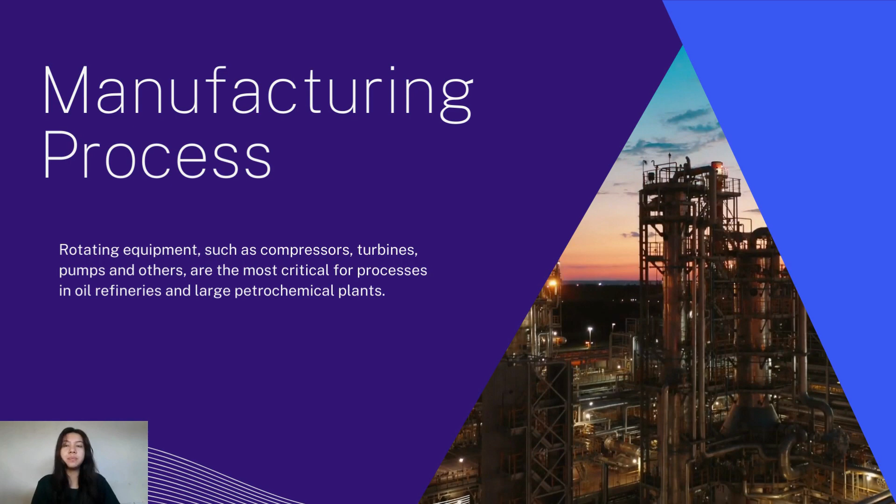Rotating equipment such as compressors, turbines, pumps, and others are the most critical for processes in oil refineries and large petrochemical plants. A refinery often consists of tankage, a distillation unit, recovery facilities for gases and light hydrocarbons, and the necessary utility systems such as steam, power, and water treatment plants.

A refinery must be equipped with proper tank facilities. The tanks are used to store raw materials and already refined products. When there are enough tanks in the refinery, there will be a continuous flow of operation as crude oil will be easily collected from the oil well and transferred into the necessary tank required for processing simultaneously.

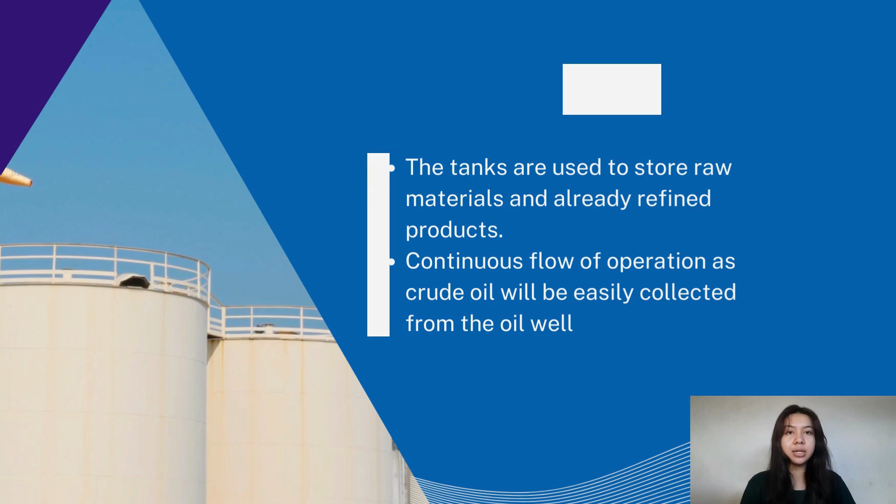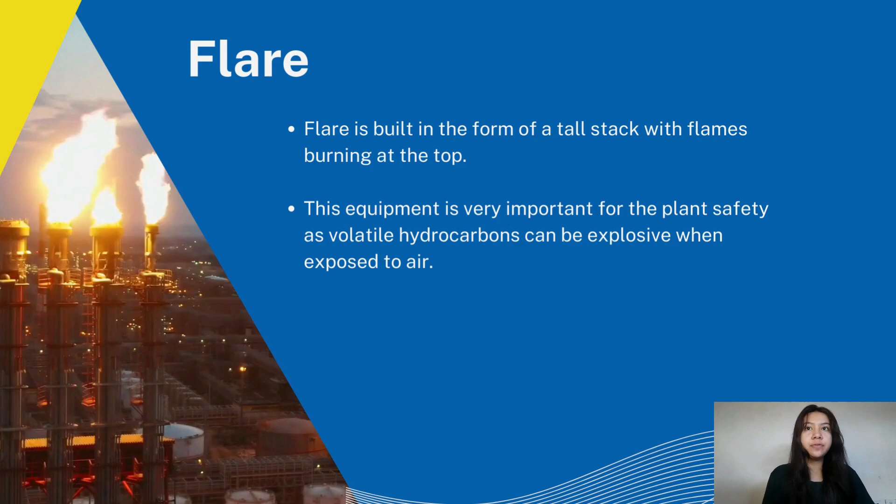The flare is built in the form of a tall stack with flames burning at the top. This equipment is very important for the plant's safety as volatile hydrocarbons can be explosive when exposed to air. In the event of equipment failure or plant shutdown, it is necessary to purge the volatile hydrocarbons from operating equipment so that it can be serviced.

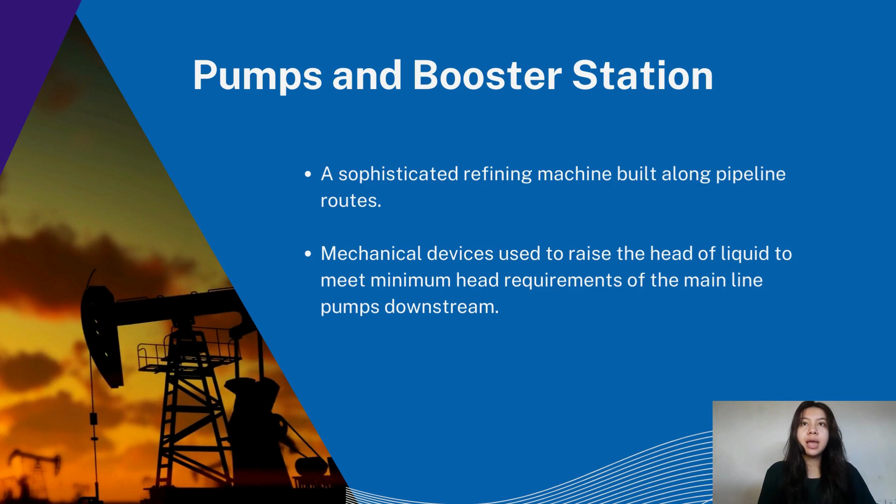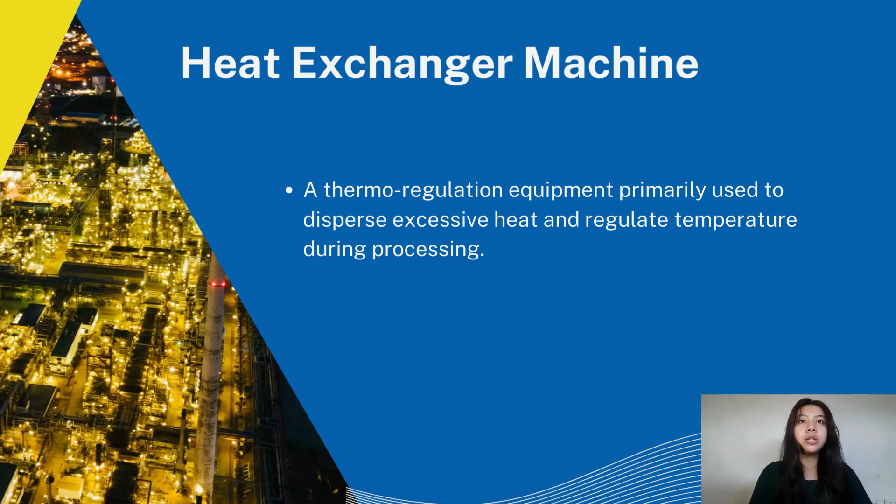A sophisticated refining machine is built along pipeline routes so that the transported material will get enough pumping power to reach its destination. The heat exchanger is a thermoregulation equipment primarily used to disperse excessive heat and regulate temperature during processing. The first media is the liquid or gas being processed, while the other media is the heat-absorbing coolant made up of chilled gas or liquid.

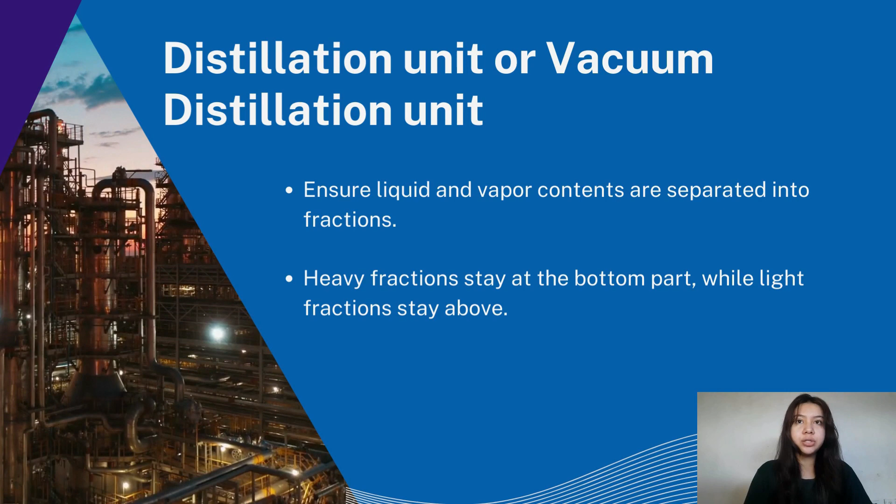The distillation units ensure liquid and vapor contents are separated into fractions. After attaining a certain boiling point, heavy fractions stay at the bottom part, while light fractions stay above. Petroleum and gasoline, which are the lightest form of fraction, rise to the top of the distillation unit to be condensed back into liquid.

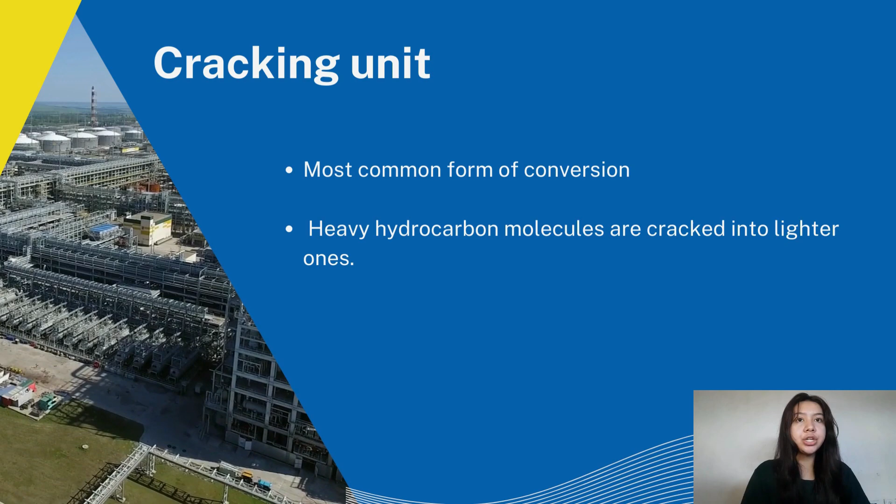Cracking is the most common form of conversion because it is powered by catalyst, pressure, heat, and maybe hydrogen. In this process, heavy hydrocarbon molecules are cracked into lighter ones. The cracking unit is made up of thick-walled reactors, heat exchangers, a chain of furnaces, and many other types of vessel.

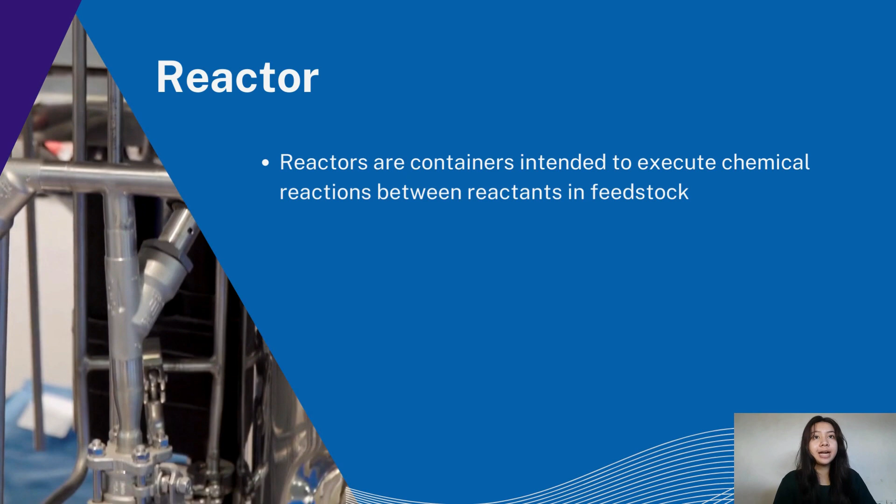Reactors are containers intended to execute chemical reactions between reactants in feedstock, or reactants in multiple feed streams, in the presence of a catalyst. Each refinery is uniquely designed to process specific crude oils into selected products.

In order to meet the business objectives of the refinery, the process designer selects from an array of basic processing units. In general, these units perform one of three functions.

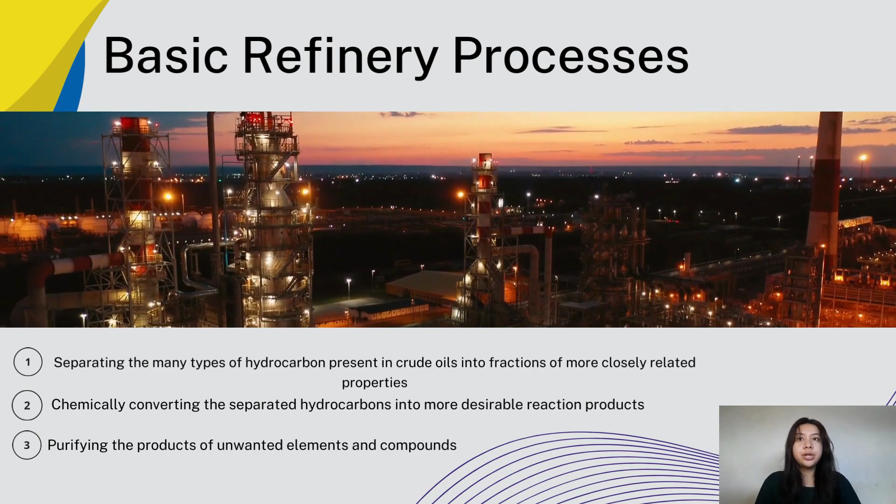Number one is separating the many types of hydrocarbons present in crude oils into fractions of more closely related properties. Second is chemically converting the separated hydrocarbons into more desirable reaction products. And the third is purifying the products of unwanted elements and compounds.

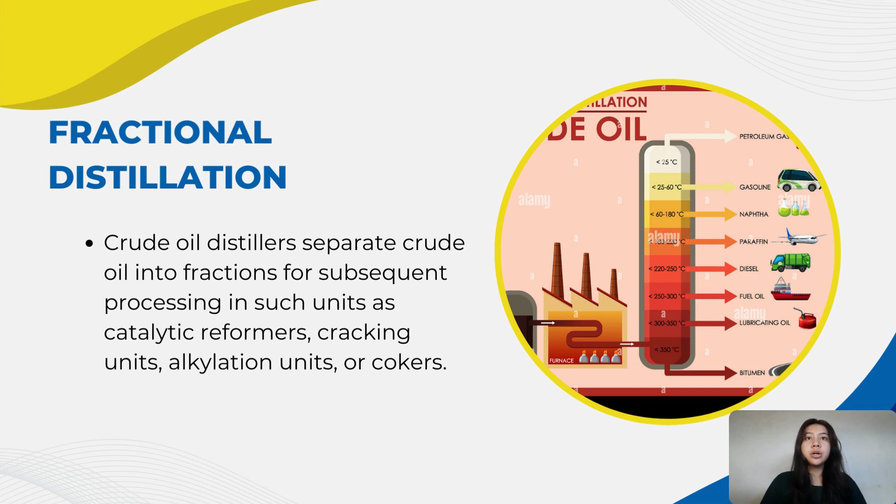For separation, we have first the fractional distillation. The primary process for separating the hydrocarbon component of crude oil is fractional distillation. Crude oil distillers separate crude oil into fractions for subsequent processing in such units as catalytic reformers, cracking units, alkylation units, or cokers.

In turn, each of these more complex processing units also incorporates a fractional distillation tower to separate its own reaction products. The principles of vacuum distillation resemble those of fractional distillation, except larger diameter columns are used to maintain comparable vapor velocities at reduced operating pressures.

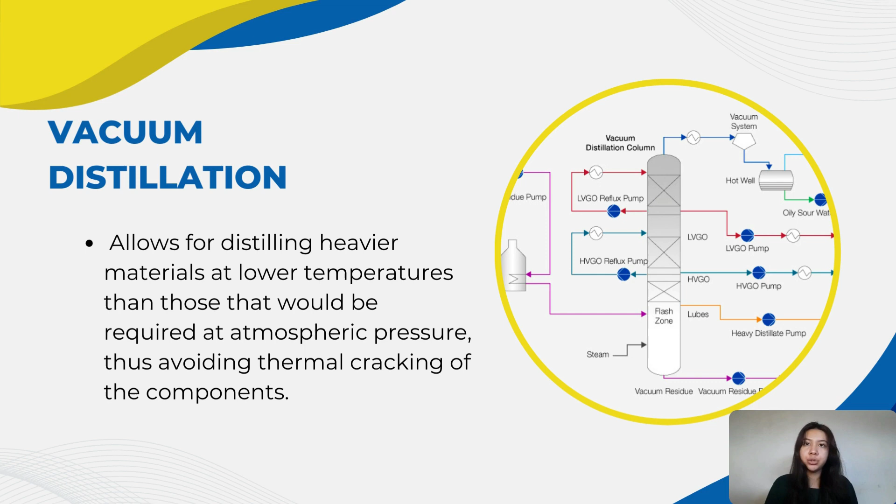The primary advantage of vacuum distillation is that it allows for distilling heavier materials at lower temperatures than those that would be required at atmospheric pressure, thus avoiding thermal cracking of the components.

Absorption processes are employed to recover valuable light components such as propane, propylene, butane, and butylene from the vapors that leave the top of the crude oil or processing unit fractionating columns within the refinery. These volatile gases are bubbled through fluid, such as kerosene or heavy naphtha, in equipment resembling a fractionating column. The light products dissolve in the oil, while the dry gases, such as hydrogen, methane, ethane, and ethylene, pass through undissolved.

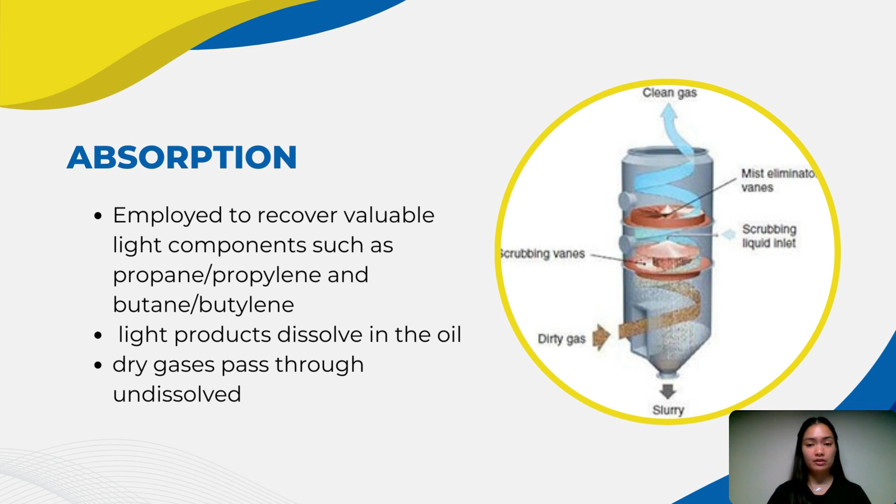Solvent extraction processes are employed primarily for the removal of constituents that would have an adverse effect on the performance of the product in use. An important application is the removal of heavy aromatic compounds from lubricating oils. Removal improves the viscosity-temperature relationship of the product, extending the temperature range over which satisfactory lubrication is obtained.

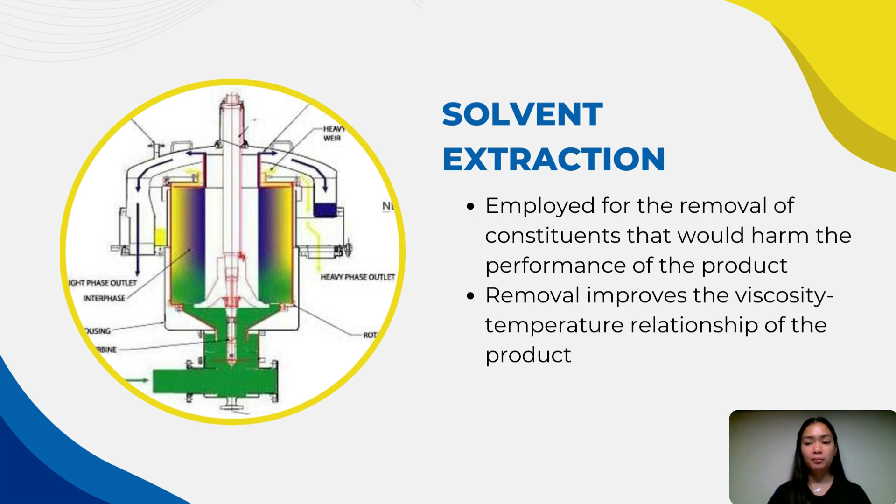Adsorption: certain highly porous solid materials have the ability to select and adsorb specific types of molecules, thus separating them from other materials. Silica gel is used in this way to separate aromatics from other hydrocarbons, and activated charcoal is used to remove liquid components from gases.

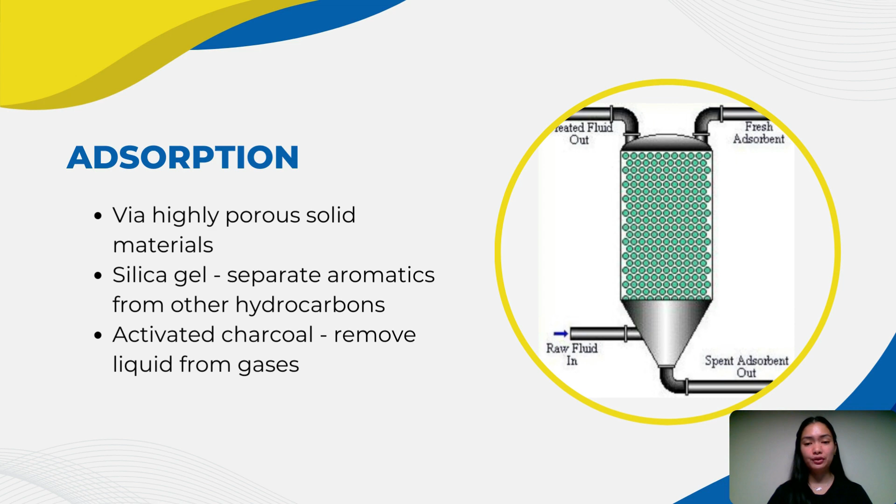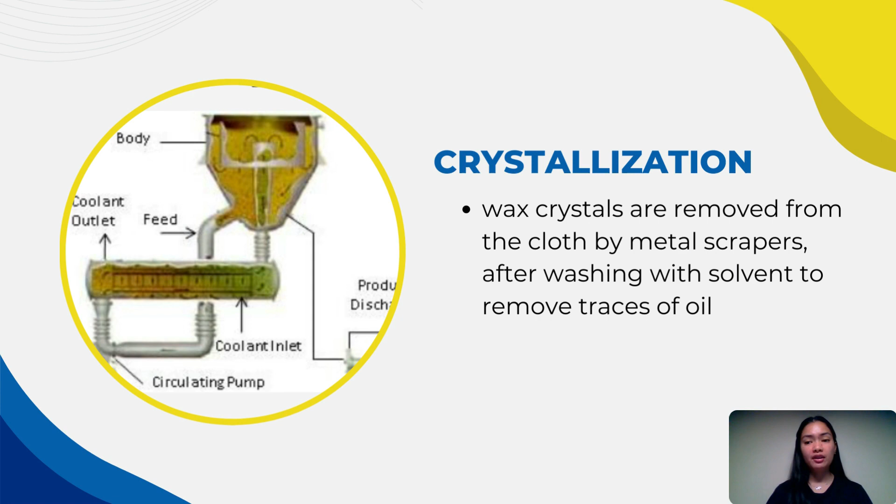Crystallization: the crystallization of wax from lubricating oil fractions is essential to make oil suitable for use. The wax crystals are removed from the cloth by metal scrapers after washing with solvent to remove traces of oil. The solvents are later distilled from the oil and reused.

And now, for the second part of the process, which is conversion.

First is naphtha reforming. The most widespread process for rearranging hydrocarbon molecules is naphtha reforming. By 1950, a reforming process was introduced that employed a catalyst to improve the yield of the most desirable gasoline components while minimizing the formation of unwanted heavy products and coke. A catalyst is a substance that promotes a chemical reaction but does not take part in it. In catalytic reforming, as in thermal reforming, a naphtha-type material serves as the feedstock, but the reactions are carried out in the presence of hydrogen, which inhibits the formation of unstable, unsaturated compounds that polymerize into higher boiling materials.

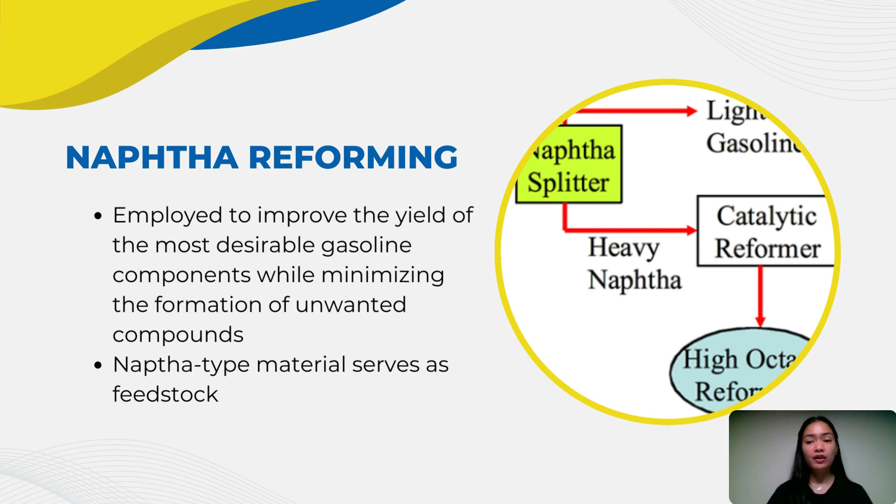Next kind is catalytic cracking. The thermal cracking process functioned largely in accordance with the free radical theory of molecular transformation. Under conditions of extreme heat, the electron bond between carbon atoms in a hydrocarbon molecule can be broken, thus generating a hydrocarbon group with an unpaired electron.

This negatively charged molecule, called a free radical, enters into reaction with other hydrocarbons, continually producing other free radicals via the transfer of negatively charged hydride ions. Thus, a chain reaction is established that leads to a reduction in molecular size, or cracking, of components of the original feedstock. The result is a weakening of carbon-carbon bonds in many of the hydrocarbon molecules and a consequent cracking into smaller compounds.

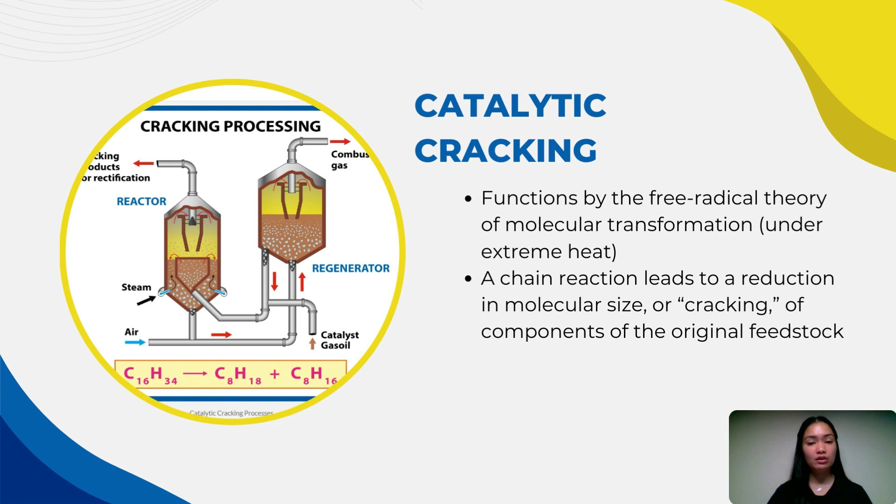Polymerization and alkylation: the light gaseous hydrocarbons produced by catalytic cracking are highly unsaturated and are usually converted into high-octane gasoline components in polymerization and alkylation processes. In polymerization, the light olefins propylene and butylene are induced to combine, or polymerize, into molecules of 2 or 3 times their original molar weight. The alkylation reaction also achieves a longer chain molecule by the combination of two smaller molecules, one being an olefin and the other an isoparaffin.

Next, hydrocracking. One of the most far-reaching developments of the refining industry in the 1950s was the use of hydrogen, made possible in part by the availability of hydrogen as a byproduct of catalytic reforming. Though hydrocracking processes use a similar feedstock to the catalytic cracking unit, it offers even greater flexibility in product yields. The process can be used for producing gasoline or jet fuels from heavy gas oils, for producing high-quality lubricating oils, or for converting distillation residues into lighter oils.

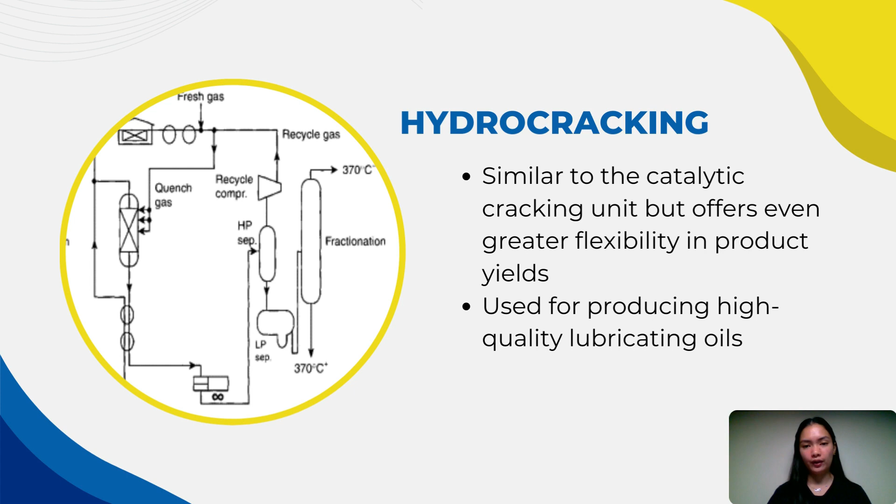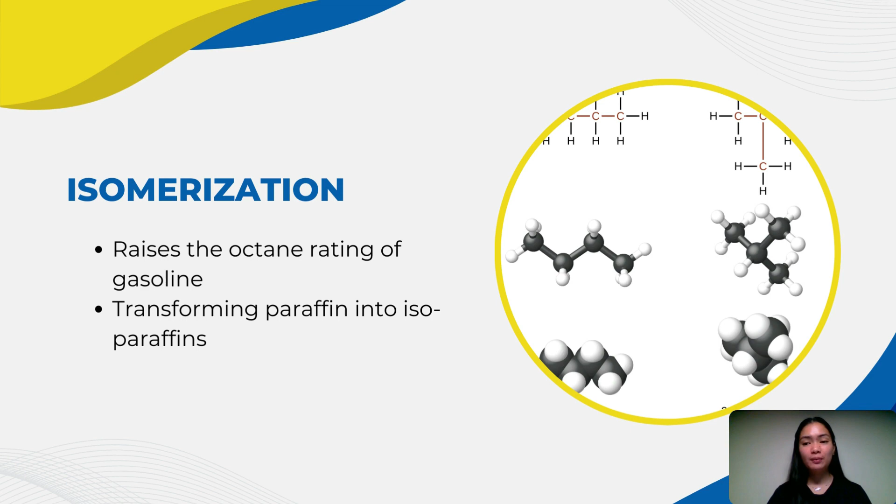The last type of conversion process is isomerization. The process of isomerization used in the refinement of petroleum raises the octane rating of gasoline. This is accomplished by transforming straight chains of paraffin molecules into isoparaffin branched forms. This method of raising the octane rating is significantly more efficient and refined.

And now, for the third part of the basic refinery process: purification. Before petroleum products can be marketed and packaged, certain impurities must be removed or made less obnoxious. The most common impurities are sulfur compounds such as hydrogen sulfide or mercaptans, the latter being a series of complex organic compounds having as many as 6 carbon atoms in the hydrocarbon radical R.

Apart from their foul odor, sulfur compounds are technically undesirable. Most crude oils contain small amounts of hydrogen sulfide, but these levels may be increased by the decomposition of heavier sulfur compounds such as the mercaptans during refinery processing. Other undesirable compounds include nitrogen compounds, which poison catalytic systems, and oxygenated compounds, which can lead to color formation and product instability.

First kind of purification is sweetening. This process oxidizes mercaptans into more innocuous disulfides which remain in the product fuels. The oil is heated and brought into contact with a slurry while being agitated in a stream of air that oxidizes the mercaptans to disulfides.

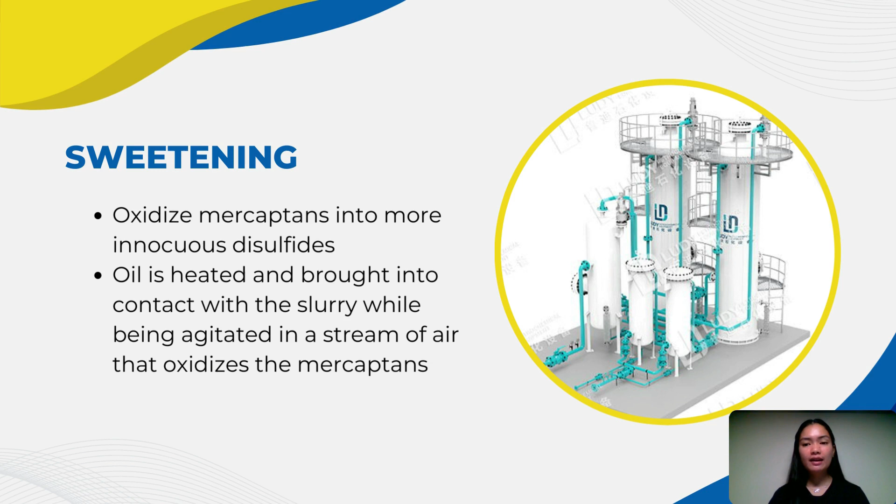The slurry is then allowed to settle and is separated for reuse. A heater raises the temperature to a point that keeps the water formed in the reaction dissolved in the oil, so that the catalyst remains properly hydrated. After sweetening, the oil is water washed to remove any traces of catalyst and is later dried by passing through a salt filter.

Next is mercaptan extraction. Simple sweetening is adequate for many purposes, but other methods must be used if the total sulfur content of the fuel is to be reduced. One such method is mercaptan extraction, which is almost the same as the sweetening process.

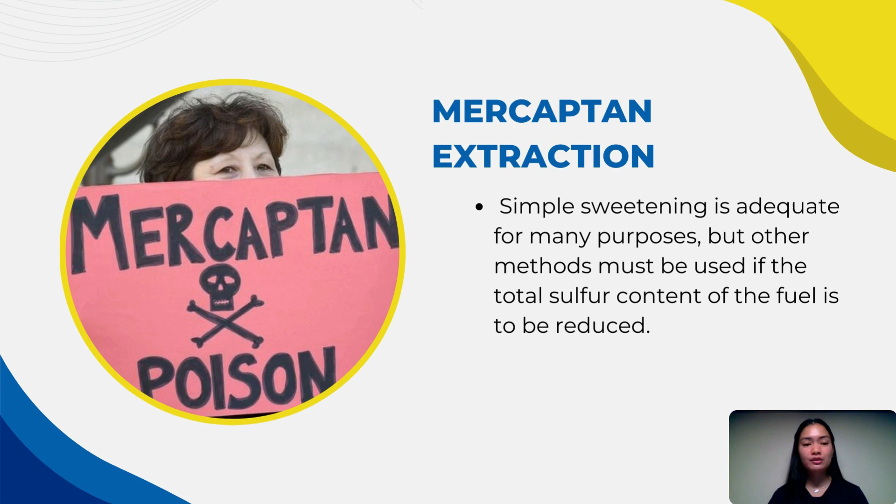Third is clay treatment. Some natural clays, activated by roasting or treatment with steam or acids, have been used for many years to remove traces of impurities. The phenomenon is similar to that described under the adsorption processes, wherein the clay retains the longer chain molecules within its highly porous structure. However, the problem of dealing with spent clay, now designated as a hazardous waste in many places, has led many refineries to replace clay treatment facilities with a mild hydrogenation process.

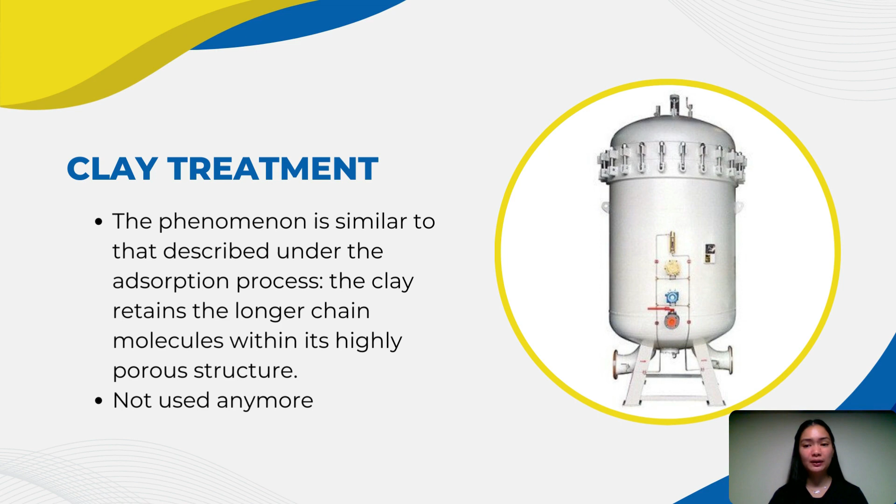This leads us to hydrogen treatment, commonly known as hydrotreating, the most common process for removing sulfur and nitrogen impurities. Here, the oil is combined with high purity hydrogen, vaporized, and then passed over a catalyst such as tungsten, nickel, or a mixture of cobalt and molybdenum oxides supported on an alumina base. The sulfur in the oil is converted to hydrogen sulfide and the nitrogen to ammonia. Operating conditions are set to facilitate the desired level of sulfur removal without promoting any change to the other properties of the oil.

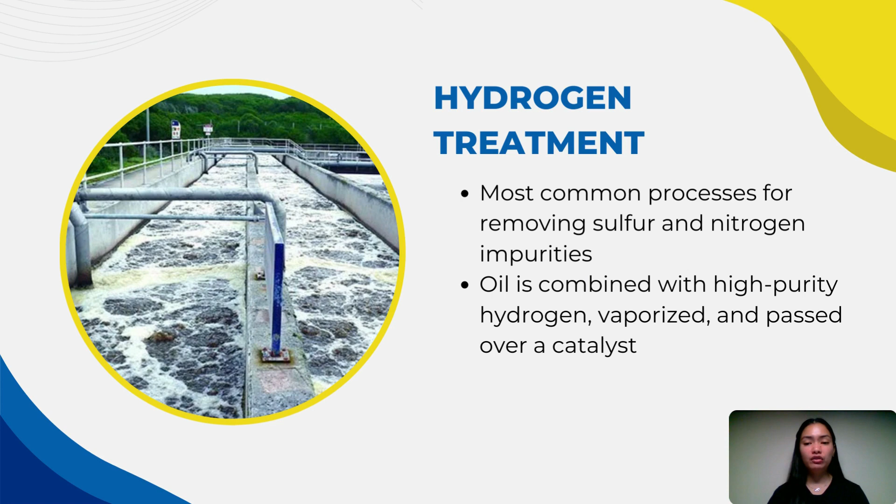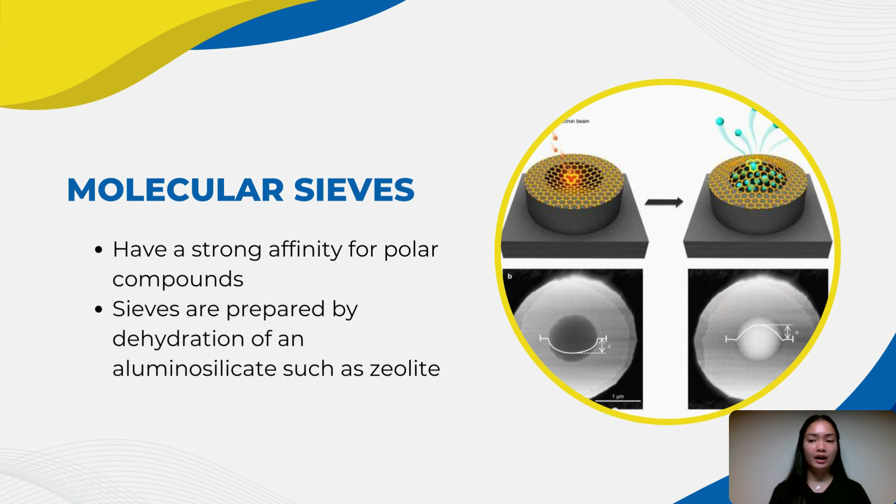Last is the molecular sieves. Molecular sieves are also used to purify petroleum products since they have a strong affinity for polar compounds such as water, carbon dioxide, hydrogen sulfide, and mercaptans. Sieves are prepared by the dehydration of aluminosilicate such as zeolite.

To summarize all the facts stated earlier, petroleum refining breaks crude oil down into its various components, which are then selectively reconfigured into new products. They follow three basic steps: separation, conversion, and treatment or purification.

For separation, discharging liquids and vapors into distillation units. Inside the distillation units, the liquids and vapors separate into petroleum components called fractions according to their boiling points. The lightest fractions, including gasoline and liquefied refinery gases, vaporize and rise to the top of the distillation tower where they can condense back to liquids. Medium weight liquids, including kerosene and distillates, stay in the middle of the distillation tower. Heavier liquids called gas oil separate lower down in the distillation tower, and the heaviest fractions with the highest boiling point settle at the bottom of the tower.

For conversion, after distillation, heavy lower value distillation fractions can be processed further into lighter, higher value products such as gasoline. At this point in the process, fractions from the distillation units are transformed into intermediate streams and components that eventually become finished products. Methods of conversion include cracking, alkylation, and reforming.

For treatment and purification, the finishing touches occur during the final treatment. To make gasoline, refinery technicians carefully combine a variety of streams from the processing units. Octane level, vapor pressure rating, and other special considerations determine the gasoline blend.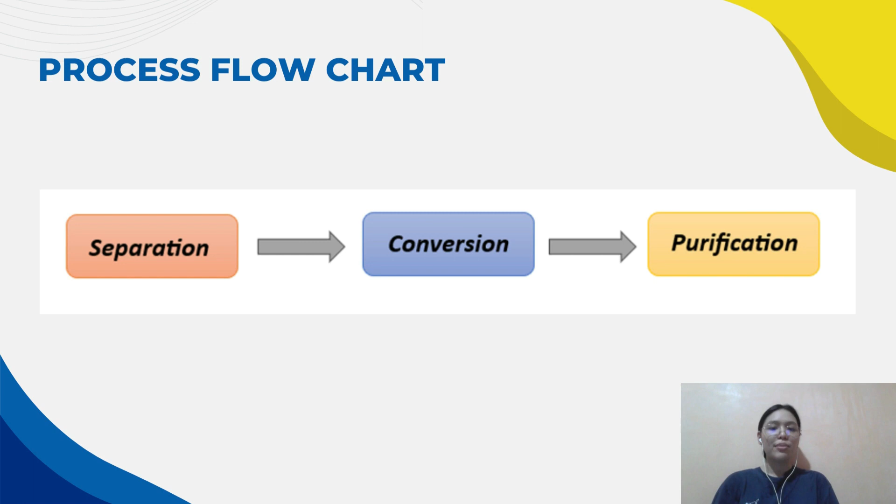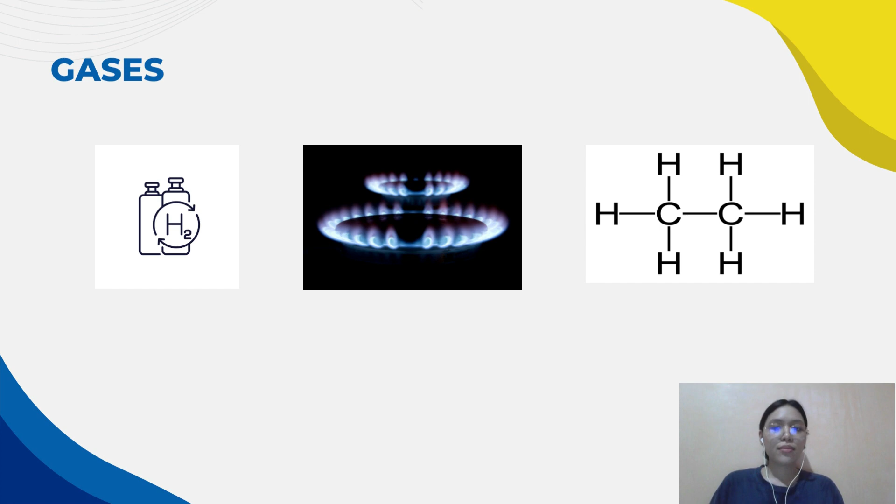The common petroleum products are gases, gasoline, kerosene, diesel oil, lubricating oils, and purified naphthas. Gaseous refinery products include hydrogen, fuel gas, ethane, propane, and butane. Gasoline is a volatile, flammable liquid mixture of hydrocarbons obtained from petroleum and used as a fuel for internal combustion engines and as a solvent.

Kerosene is a combustible hydrocarbon liquid derived from petroleum. It is widely used as a fuel in aviation as well as households. Diesel fuel, also called diesel oil, is a combustible liquid used as fuel for diesel engines, ordinarily obtained from fractions of crude oil that are less volatile than the fractions used in gasoline.

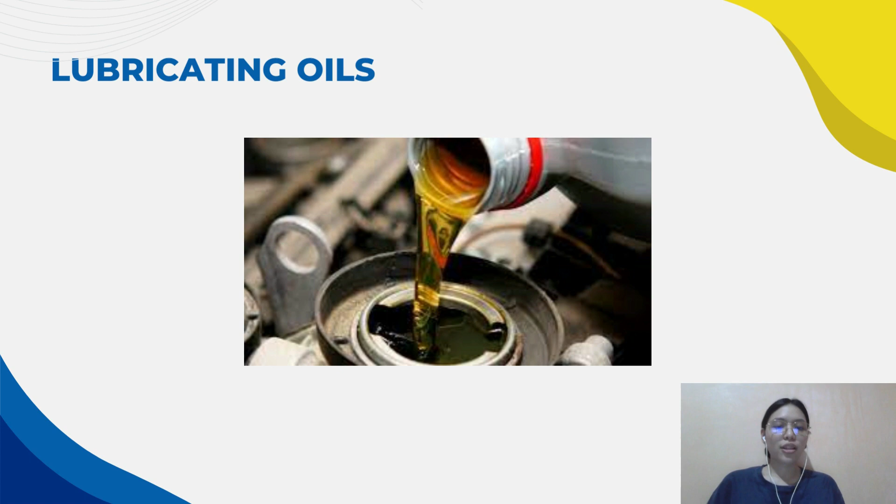Lubricating oils, or sometimes simply called lubricant or lube, are a class of oils used to reduce the friction, heat, and wear between mechanical components that are in contact with each other. Purified naphthas are used as solvents in paints, cosmetics, and dry cleaning.

By 1970, the global petroleum refining industry had established itself firmly, with the delivery of crude oil for refining into petroleum products reaching nearly 2.3 billion tons per year, equivalent to 40 million barrels per day. However, as the world became increasingly aware of the environmental impact of industrial pollution, the petroleum refining industry became a focal point for change. Petroleum refineries are essential for meeting global energy demands and providing a wide range of refined products that are vital for transportation, industry, and daily life.

These refineries have undergone significant changes to address environmental concerns and comply with regulations. Petroleum refining is presently one of the industries with the strictest regulations worldwide.

They have adopted advanced technologies and stringent measures to mitigate pollution, reduce emissions, and minimize their ecological footprint. While processing over 4.6 billion tons of crude oil annually, or about 80 million barrels per day, it devotes a considerable percentage of its resources to minimizing the negative effects on the environment. By prioritizing sustainability and continual improvement, petroleum refineries strive to balance energy needs with responsible environmental practices.